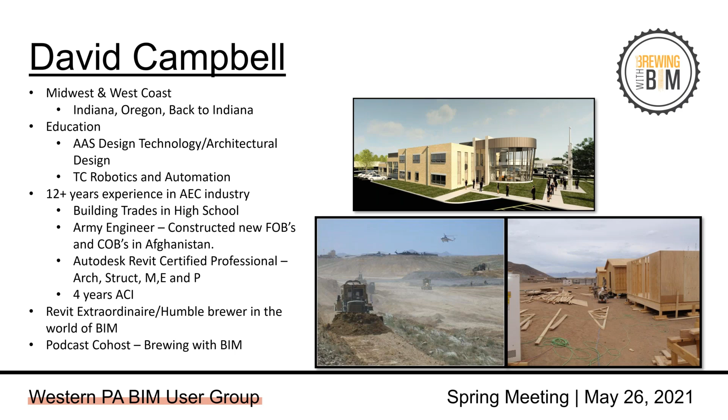I've been approached several times why a user group, and before I click through, let me explain something to you guys. In the Pacific Northwest, where Dave and I lived for a few years, you just moved back to the Midwest. I moved here about a year and a half ago.

Even when I lived in Texas, user groups were prevalent. They were a way for everybody to share information. If you were new to something, it was a great way to meet up with more experienced people, start a conversation, almost like an impromptu apprenticeship. And I love user groups for that. I love sharing information, just the environment of it, just the dynamic of interacting with people.

That said, in the Pacific Northwest, Dave, you and I hosted I don't know how many user groups, and then across the country we did this thing called tap tours, and we went to visit different cities and hosted in breweries all across the country. With that stuff though, we got a kind of microcosm of an environment, like we were creating a mini AU of sorts, where alcohol was free flowing, which is definitely key when we're talking about AU. But there was also great construction technology happening, conversations happening. So that was always great.

But the reason why we wanted to bring that here is because honestly, click the next one, my man, this is the best city, hands down. I've lived in like a dozen cities, and Pittsburgh, it's got its quirks, but I love it. It's pretty kick-ass, and I can say that this is a user group, right? It's great, so I love being here.

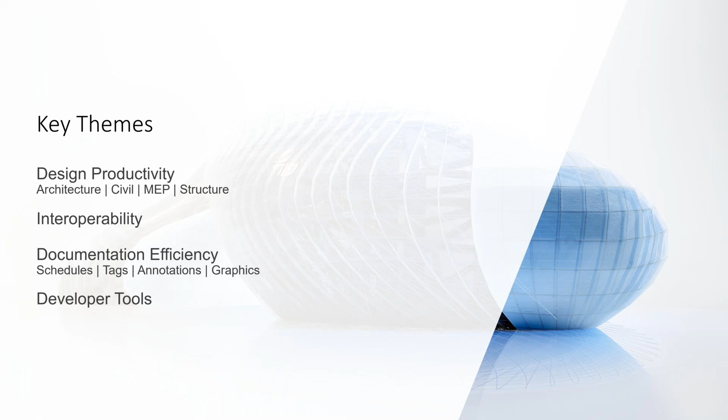Thank you, Joey. There were so many feature updates to Revit 2022, I had a hard time cutting them back without being discipline specific. I've included a lot of good features here. I'm going to demo quite a few of them, but I have a list of all the different features I'll show toward the end of my PowerPoint. If you have questions on any features we didn't cover, feel free to reach out. Starting with what's new in Revit 22, we have to talk about the key themes. Autodesk typically breaks down features into themes: improving design productivity, interoperability or collaboration, documentation efficiency—schedules, tags, annotations—and developer tools, so what's new with Dynamo. Some of these I won't go too deep into; I don't want to do death by PowerPoint, so I'll jump in and out of the PowerPoint into the program.

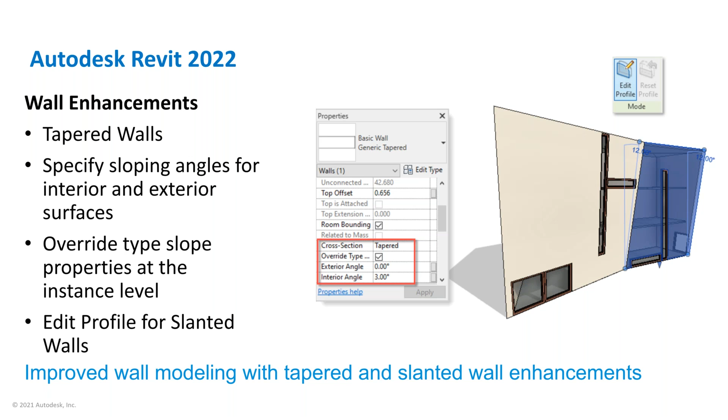Let's get started with design productivity. The first one I'm going to dive in and show you is the wall enhancements. One cool thing is that we've now got the ability to specify tapered walls. You can specify the sloping angle for your interior and exterior surfaces, override that type slope property at the instance level, and edit your profile for slanted walls if needed. If this wall is going to be tapered, we'll scroll down into Revit and see the cross section in properties, where we can select tapered, vertical, or slanted, and specify my angle. So if I wanted, say, a 6 degree exterior angle, I can hit apply.

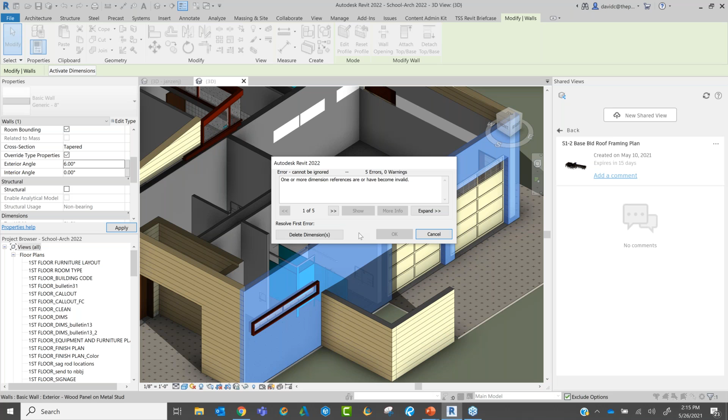And it's going to let me know that one of my dimensions has become moot, but there we go. So now we've extended out the bottom portion of our wall.

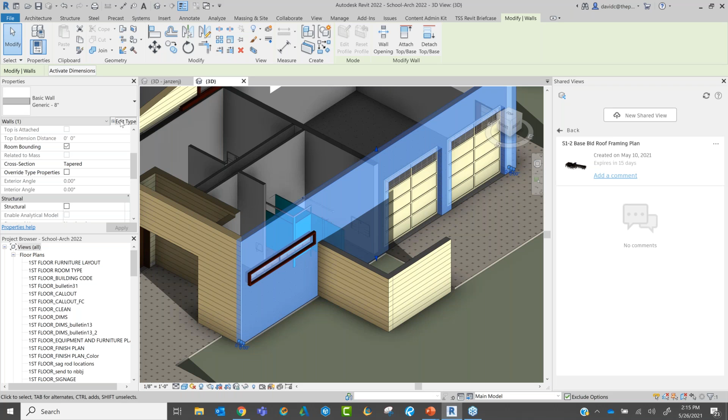If you want a slanted wall, you can adjust the angle from vertical, and for the vertical wall, we can select any one of these. One thing you need to think about if you're going to use a tapered wall is that one of your elements, at least the core or one of the parts of your assembly, needs to have a variable thickness. This is an important part when editing that profile for these different slanted walls. We need to make sure they are variable in order to adjust as needed.

Now we do have enhanced RPCs for realistic views, just another rendering improvement. Essentially, Revit is supporting the new RPC 2.0 file format, which helps display complex, high-resolution geometries, physical-based materials, and lighting, giving you more intelligent parameters. You have asset parameters that you can assign and utilize to improve the performance of your realistic views, with options to switch off different RPCs in the model or display the orientation in billboard mode towards the camera.

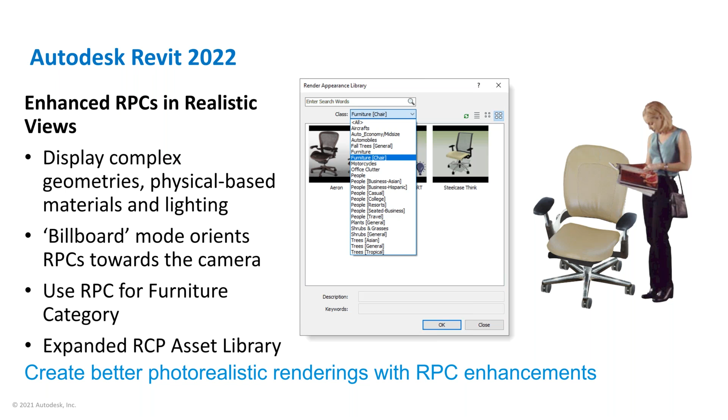Now, another one I'm going to jump in and show, because I thought this one was really neat, is a route analysis tool. This helps us visualize the multiple ways occupants can move in and out of a space. If you have a one-way situation, with COVID we've dealt with, at least at the beginning, a lot of grocery stores trying to control traffic through the building and specify that these are going to be one-way. So we needed to make some of those life safety travel maps, or even just maps for navigating the stores themselves.

This is also going to allow us to place elements with built-in clearances. So if we know that a person needs 5 or 6 feet of spacing, that social distancing, we can place a person with that built-in distancing space. Then we can overlay spatial grids into rooms to aid with element distribution, helping abide by those physical distance requirements.

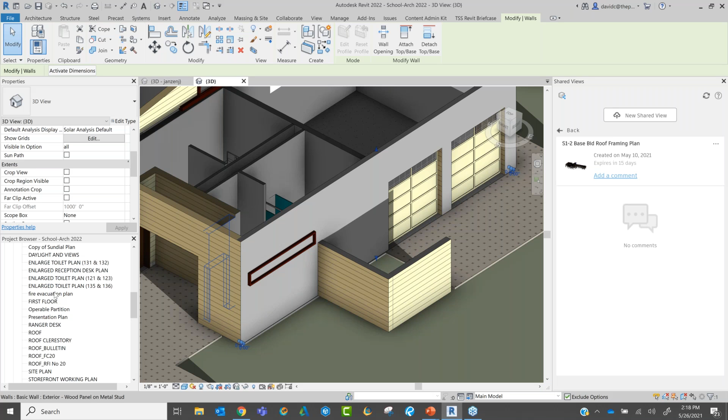And I'm going to jump into Revit for this one as well. I'm going to go ahead and get into, where's my life safety plan? Let me find this one. I should have opened this up already. Oh, there it is, fire evacuation plan, that's fine.

So you're going to see I've already drawn one up here, and this is kind of what I was talking about. Here's the one-way indicator. Here's one of those people we can put with, let's say, a 6 foot distance. Now, to draw these out, it's actually pretty awesome, they've made it quite easy to do this. We go to the Analyze tab, and here's where you can go with the path of travel. If you have multiple paths, you can select that as well. Here's your one-way indicator, the people content, and that spatial grid.

What's nice about this is if I know I'm going to go, let's say, from this room here, I want them to actually go out to this door. Typically I'd have to draw it up, draw it over, and then draw it back. This was 2 clicks, and it's going to essentially draw that path of travel for me. So to do that again, I'm going to draw this here and push it right along with this one.

You're going to see that it's going to join these two lines together and merge them here for that kind of one line of travel. Okay, and it's doing that automatically for us.

Now, if you notice, right here, I need to probably add a point to bring this thing back a little bit, so I'm going to add a waypoint. This really just means that you can customize where this line is going or where they need to go to. You'll see it grab that line here, so I could do the same thing here, or just update it. I need to pull it back here, I guess, so I'll add that waypoint, and then I can bring this back the same way that I did the other.

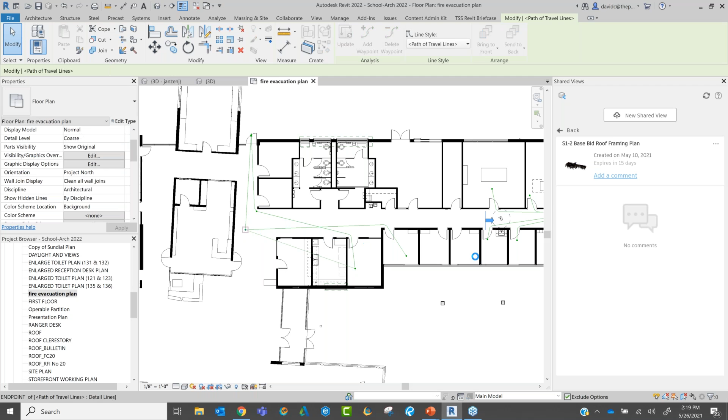And it automatically adjusts for me. So those are very nice features, especially for drawing out those quick plans.

Now you'll also notice that we have some infrastructure enhancements. They actually gave us a modeling capability for bridge and road categories. Essentially, you can utilize a generic model family, create a template, and it can be assigned to that bridge and road categories and your subcategories, your abutments, your piers, different things like that. Now these families can host rebar, they can be defined as cuttable in views, and now they can be scheduled and tagged.

Now you're also going to notice that they've provided some small enhancements to aligning and stationing these. You'll see that you have the flip controls to add to the alignment station label. The true start and end stations of your alignment are exposed, and in your Revit API, if you want to automate some of that bridge design, we can do that as well.

You're referring to Dynamo? Yes sir, I am referring to Dynamo. I apologize. No, man, just making it a conversation.

Yeah, it's kind of full circle here, because what they're doing is giving us that capability. They've added it into the developer tools, but the problem was we'd have an issue connecting to some of these different families, especially if we're wanting to break this down into, like it's showing here, piers under that infrastructure, or under that bridge family, or the template that you're using.

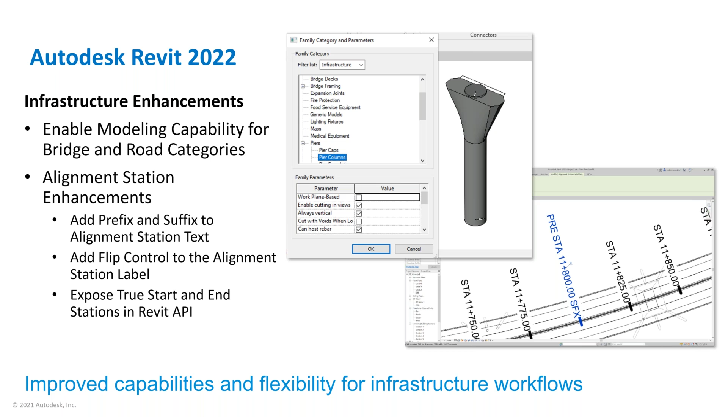Now you'll also notice they gave us the capability to rename the default shared site. I was wondering when this one was going to be there, to help with the confusion we've had for quite a while in terms of naming the survey point or the shared site point. Essentially, right now, we can go ahead and rename this default shared site location in any template.

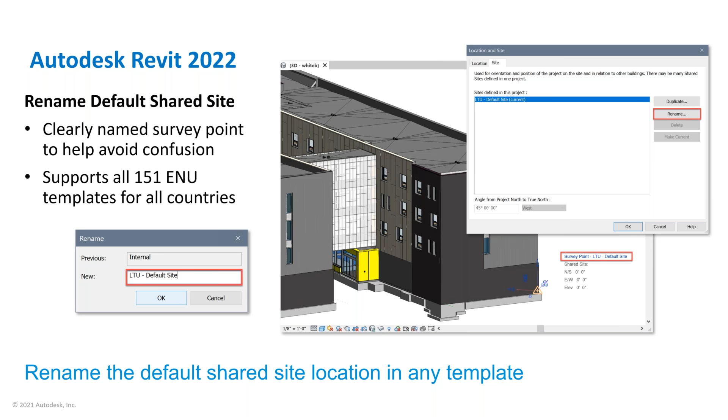Now another improvement for more of my MEP folks, they have made some improvements to design to fabrication. One big thing I really like is that the tool itself is a little bit more flexible, enabling the mapping conversion from your Revit families to fabrication parts. You'll notice that it's actually showing here in Revit 2021.

I was dealing with this earlier today, where I would convert my design parts to fabrication, and my connections just don't come over. Then all of a sudden it gives me this message where I have open connectors. Well, with Revit 22, they've given it the intelligence to notice, hey, we need an elbow here, we need a T, we need a Y, and it's giving us the capability to add in our tapered ends or what have you, and bring those elements in instead of just faulting out and telling us it's open, and then I have to figure out how many of these are open and where they are.

Now you'll also notice that you can connect your fabrication elements together in Canvas by dragging your connectors, as with your design parts, and your fittings can be placed. That's really going to give us more consistency with our different layout tools as we're actually drawing our pipe.

And we can use essentially these different design line logics and things like that to send out to the CAD MEP, EST MEP.

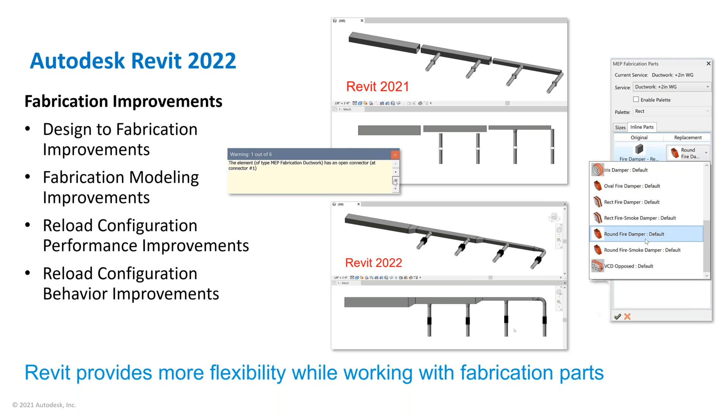Now, another tool we're going to see focusing towards the MEP or HVAC side, you're going to see that they've added some new functionality with systems analysis in terms of the load and psychrometric reports. You're going to get more detailed reports and outputs and be able to explore those different results in, I believe, an HTML web browser. Essentially, after running the simulation on your systems analysis model, you can view that summary for QA/QC checks. You can report and show a breakdown of your different load components, your totals for sizing of equipment, that psychrometric chart, and detailed psychrometric state point properties in printable formats.

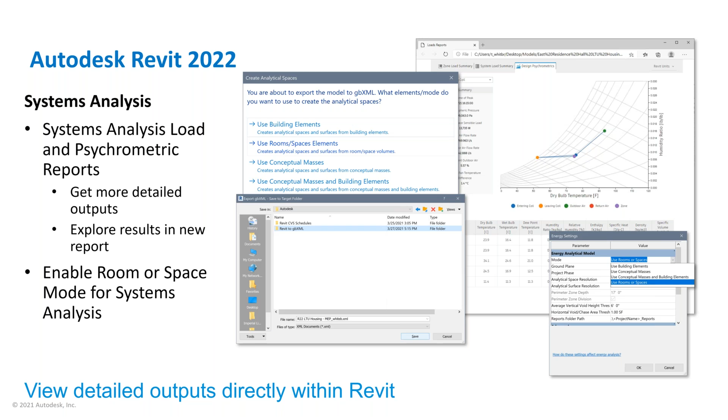So you can also export this to, if you need to consolidate it into that kind of Excel environment. I don't know why I said GBXML.

Another addition you'll notice is that they've actually tied back to the infrastructure, bridge, and road workflows. They're adding some more family categories for equipment and your different building elements. They've expanded these out to include audiovisual devices, fire protection, food service equipment, hardscape, vertical circulation, temporary structures, just different things like that.

And essentially, those families can be assigned to those categories, be defined as cuttable in different views. They can be scheduled, tagged. It's just helping to really start, I guess, get into more of the phasing and breaking down of the individual elements of these models and families, so we can schedule them out, or at least start phasing or planning a little bit better.

Now, you're also going to notice that they've expanded the category list for MCS, for your multi-category schedules and your material takeoffs. That just means when you're creating your multi-category schedule, you're going to find a few more categories and subcategories to choose from.

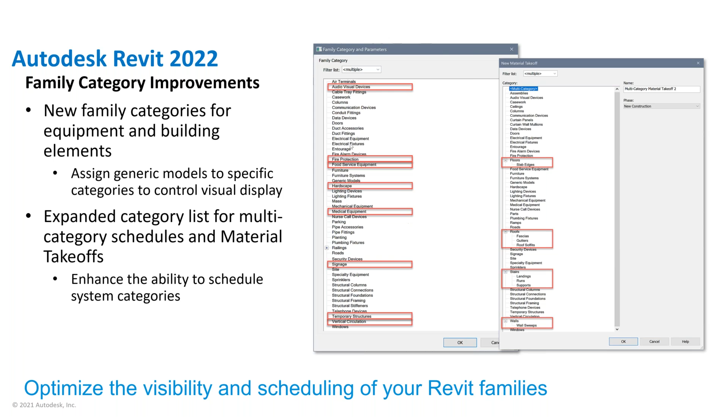Now, modeling rebar. This is an interesting one here, because I've actually had some good conversations with Joey about this, because we talk about Revit families that are created. This is where they had most of the enhancements - there were like 30 slides just on rebar. Oh yeah, there were so many enhancements for structural, which I'm feeling pretty happy about, because I started out kind of structural within Revit, and I'm seeing all of this functionality coming over from, let's say, Advance Steel, but also the rebar portion of it.

In this instance, Joe, we were talking about families, and a lot of times it would be great to be able to model in like an offset or a clearance spacing. In this case, that's what they're kind of giving us here, in the sense that anytime you're detailing your rebar, you can go ahead and, if you know your rebar is going to have ribs or something like that, and the real diameter of that bar, you can specify that model bar diameter. Now, of course, the rebar constraints, your distances to the concrete cover, your bar geometry, the segment lengths.

They're going to be computed using that model bar diameter parameter. So in that sense, it's just saying, if you want your cover spacing to be 2 inches and you adjust the size of that model bar to thicken it out, it's going to go ahead and drop that bar down to automatically place it where it needs to be. It just has that intelligence to be able to recognize that.

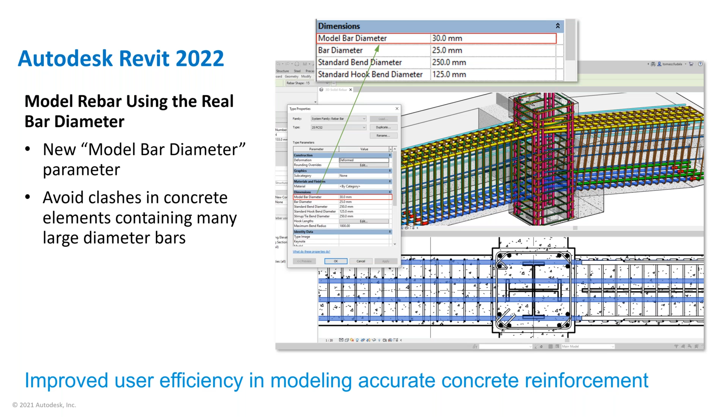Another cool feature is that we can move rebar within a set. Typically, we'd tab through to select different rebar paths or sets, but now you can grab the entire set without tabbing through, or move and remove individual bars within that set to avoid clashes with other rebar, openings, or penetrations, while maintaining the logic of the overall rebar set.

Another interesting thing is that you can edit multiple sets or systems at the same time. If you're looking at a repeat detail inside a footing or column, like common penetration holes throughout the first through third floor, you can grab those multiple sets and make changes all at once.

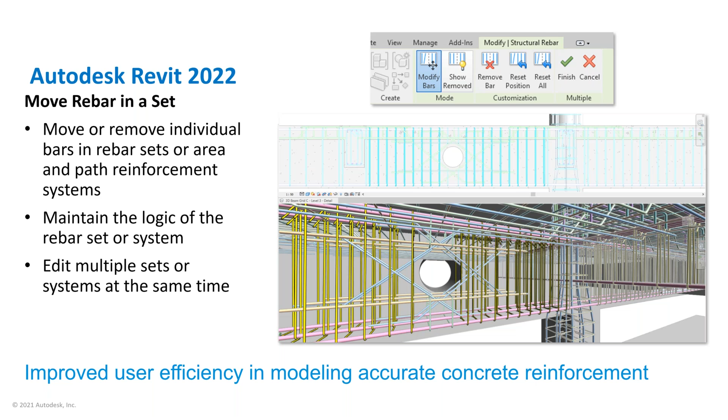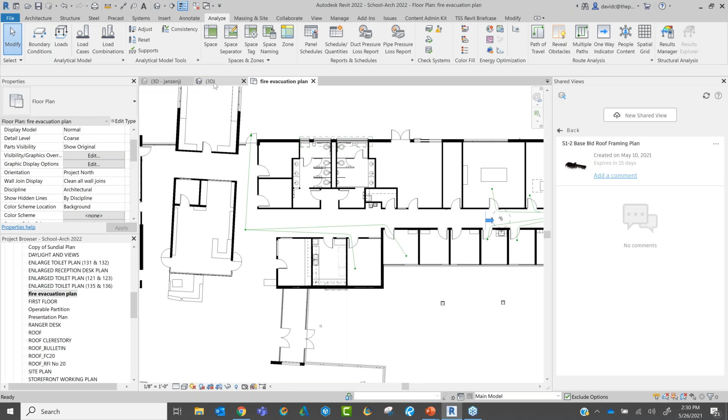This next one I wanted to show because I thought it was really neat. We can utilize this new tool to place rebar by just clicking 2 points. For those who've modeled rebar in the past, we had a tool where you'd select your host surface, then your start surface, then your end surface, giving you the capability to model rebar traveling through there.

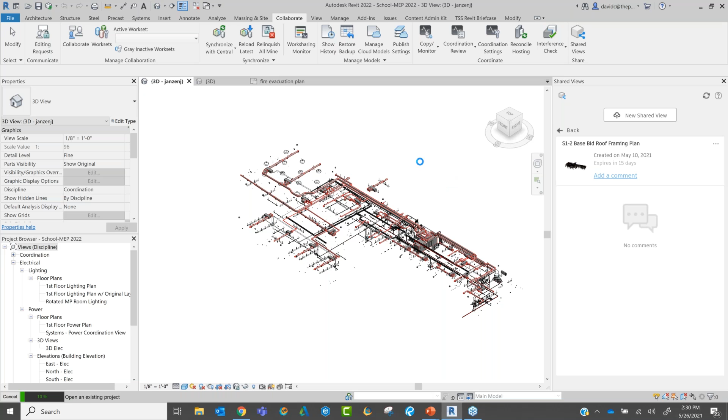I realized I did not open my model, so I apologize. Let me grab this one up here real quick. Okay, I'm going to overwrite, and that's good. This one's kind of giving it away. I am going to talk about those shared views here in a little bit as well, so we'll dive into that, don't worry.

What I wanted to talk about within this structural model, if I get under either structure or under steel, I'll typically see those rebar options.

Now I can also, I think I might have froze up Revit here. I might have just opened up the wrong model. This thing might be having issues for me. I apologize, guys. It wouldn't be a webinar if we didn't have technology freeze up on you. I feel like that's par for the course, man. Yeah, I don't know what it's not liking me very much, but it's always the live demos, of course.

Essentially, when you click on that slab, we can click on the rebar tab that'll populate there. It's nice because if I wanted to take rebar throughout this entire slab, I'd click on the corner here and maybe a corner over there, and it would fill up the entire slab with rebar based on those 2 points. I could also specify the number of bars, the layout type, maximum spacing, maximum number, or minimum spacing. So creating your basic rebar sets, but with less picks and clicks to populate the rebar throughout your element or concrete.

Since I can't check if this one's come up yet... no. Okay, so I'm going to jump back in here then, and we'll keep going until the next one I wanted to demo.

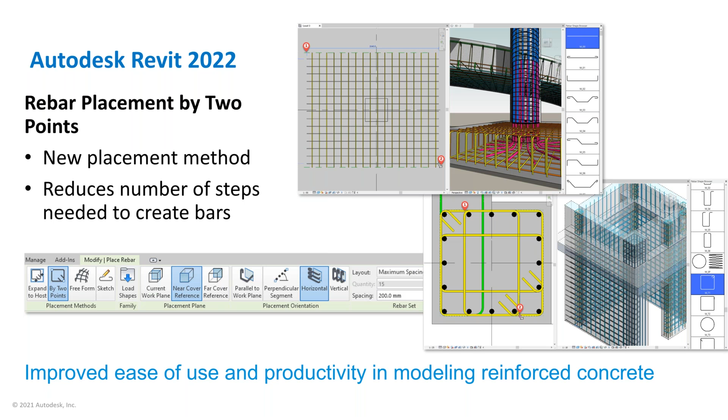Another mention here, back to Dynamo: you'll notice we can associate our steel connections with different profile sizes, multiple profile sizes. So if you create a library of steel connections, you have predefined ranges of applicability you can specify. For example, if I have a base plate I want to apply to any of the 14 by 43 columns, but also to any W16 by 26s, I can specify that range of applicability, and when I run my Dynamo script—base plate by ranges, in this case—it'll run through, notice that entire range of columns, and apply those base plates for me.

It's really nice in that case where if you're using different types, whether it's concrete or steel, or different family types or instances within the project. Most of the time you got to click on it, grab all those instances, run it, then go back again and grab the other ones. At this point, we could just include them all in one.

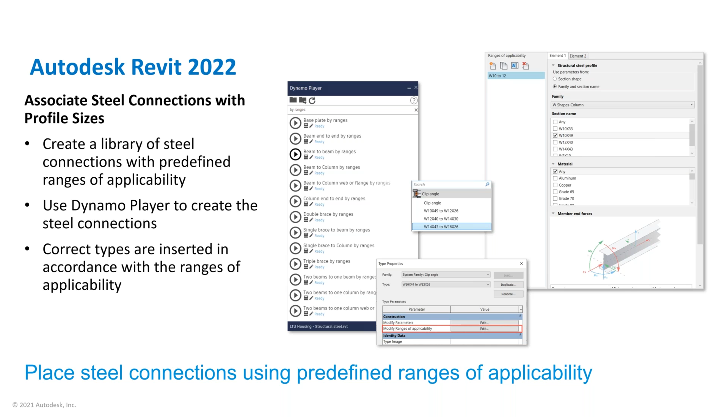Now back to that categories. They've made some category lists in terms of sorting within your schedules, so we can actually break it down and filter by our category. You're going to see that essentially we can just start the filter itself by the category and then break it down as we need to from there.

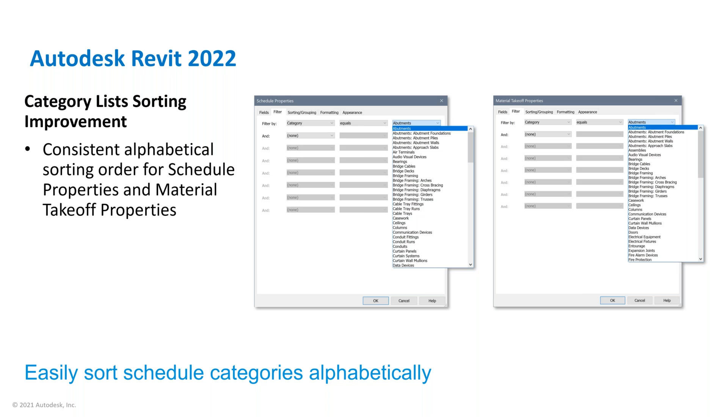They've also given us improved parameter identification UI, adding some parameters for the user interface. What we're going to see is that you can literally search the parameters by name, and filter them by their properties. So if you're looking for what parameter might be involved with something like total length or system name, we can go ahead and start searching what parameters are involved with that. We can also use information in those tooltips - as you highlight or hover over something, that tooltip will pop up to help you identify the correct parameter to work with.

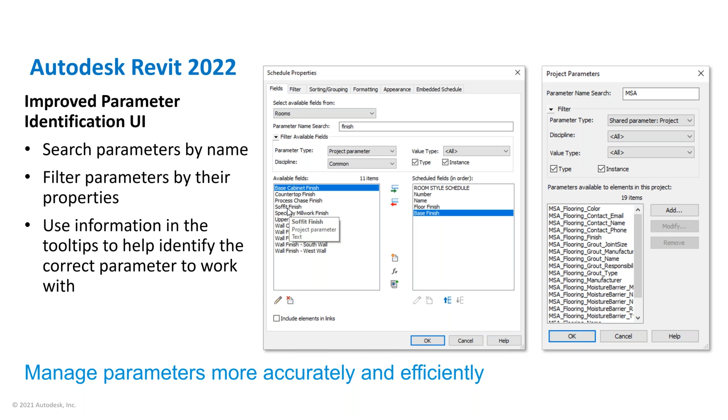This one, for any of our older Revit users, is going to be pretty familiar. I don't know if anybody remembers - back in the day we had Autodesk Seek, and it kind of went away for a while, became BIM Object, and we used Revit City and all these other sites to bring in content. But essentially Autodesk has brought it back as Load Autodesk Family.

What that means is that it's just going to open that default content provided by Autodesk, accessed from a cloud-based repository. In the past few releases of Revit, they haven't been releasing the content as you install Revit. You typically have to go to another website, find that content pack you want, download it, and move forward, unless you're going from a completely custom library. In this case, they've thrown it up on the cloud, giving you the capability to tie into that family data hosted on the cloud.

Now you're going to see that there are sequential search facets that you can essentially add or display the criteria for each of these families. So as you start building your different categories or filters, you're going to see that you can just kind of break it down based off of the type, the category, or what have you.

Another one I was confused as to why it took so long - I don't know if anybody remembers back when you could not detach a tab for your Revit models. If you wanted to work in one floor plan and switched to another, it just overlapped it. You had to try to tile or cascade your windows to see all the different things you had going on, or if you had multiple monitors, stretch it over. This is one of those things that took a while, but I'm glad it's here - they give us the capability to resize our dialogues now. Some of those, like visibility graphics, purge unused, edit text, things like that - before they didn't really let you move or resize them much. Now you can reposition that as you need to.

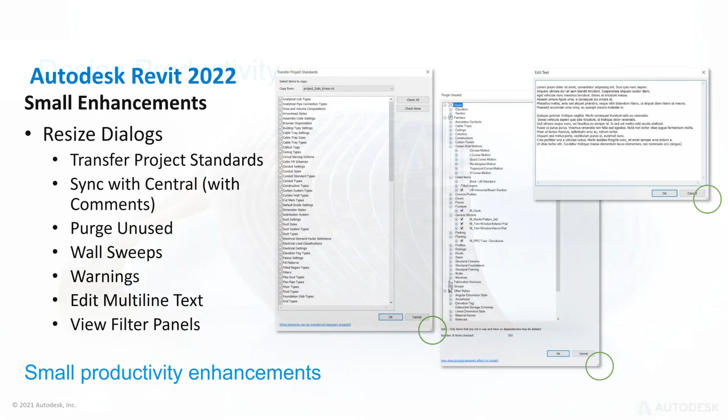All right, now on to the next portion of this: design productivity. With design productivity, Autodesk has given us a native 2D PDF export tool. Just like printing out to all of your other mainstream PDF programs, the PDF export dialog offers similar options to the print dialog - your ability to export the visible portion of the view or a user-defined selection of views and sheets. Your naming rules can be set up within the setup section of the dialog box, and you can use this to generate those PDF file names automatically based on your project or sheet name parameters. You can also choose to have the exporter detect output size and orientation automatically from the selected views and sheets.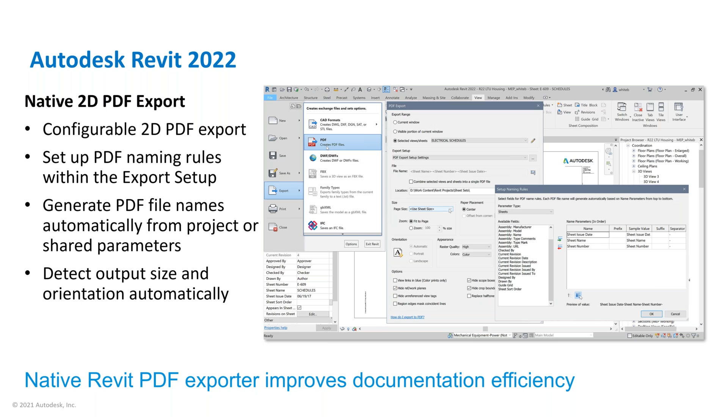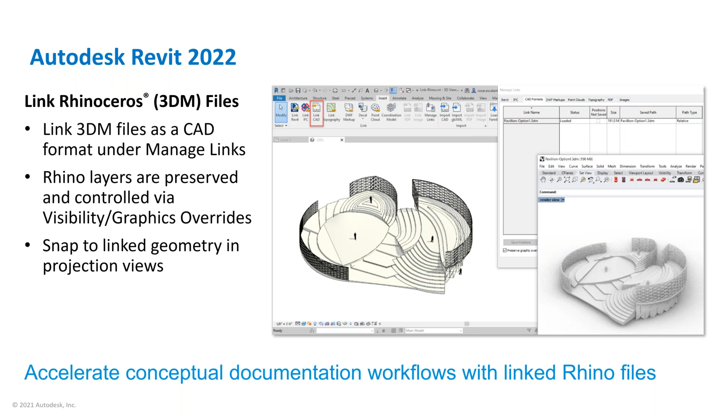Another one I'm excited about, because I've personally worked in this, is the improvements they've made with FormIt Pro - 3D sketch and send to Revit. That's been something we could do for a while, exporting from FormIt and bringing it into Revit as a mass, translating the masses or geometry to walls, floors, roofs, things like that. But with Revit 22, they've expanded those functionalities to better integrate Revit with FormIt Pro. Now you can translate Revit elements back into a FormIt Pro session using the new 3D sketch functionality, so we can continue exploring and tweaking the design using those intuitive modeling tools in FormIt, then send that geometry right back into Revit.

I feel like FormIt is the most unutilized tool in the AEC collection. I agree, I can't agree with you more.

For me, this functionality it has within FormIt to be able to just push and pull - I've actually got my 9-year-old son and my 11-year-old daughter just working on FormIt, playing on FormIt. They build their robots, they build buildings, they build their little houses, kind of like on Minecraft. It's a very intuitive program.

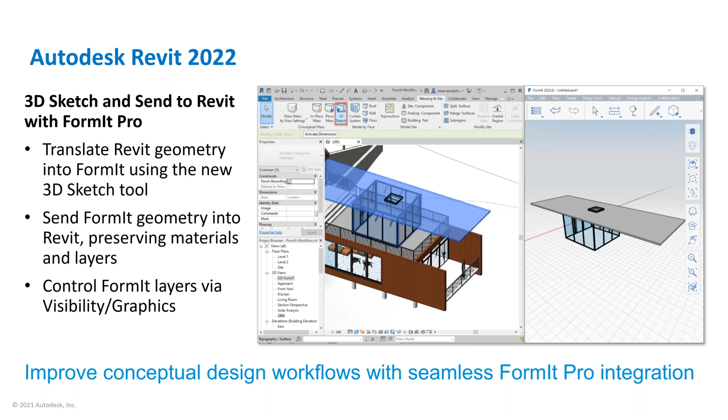As we knew before, one of the problems of trying to bring a family from FormIt into Revit is that it loses the intelligence. But if we can send something from Revit to FormIt and bring it back and have it keep its intelligence, I think that's very, very important. Speaking of intelligence, the next portion of this actually goes into that as well with the IFC4 export certifications for architecture and your structural reference views.

So what they did is they went in and got that certification for the IFC4 reference views, but it just sets the definitions and the associated Revit shared parameter definitions. They've been updated with the latest IFC4 PSDs, and it's really supposed to significantly improve the performance of linking in some of these IFC files containing elements with a lot of different parameters.

And they've added the ability for your IFC exporter to pick up information from your site location regarding the geocoordinate reference in EPSG code format as required by IFC.

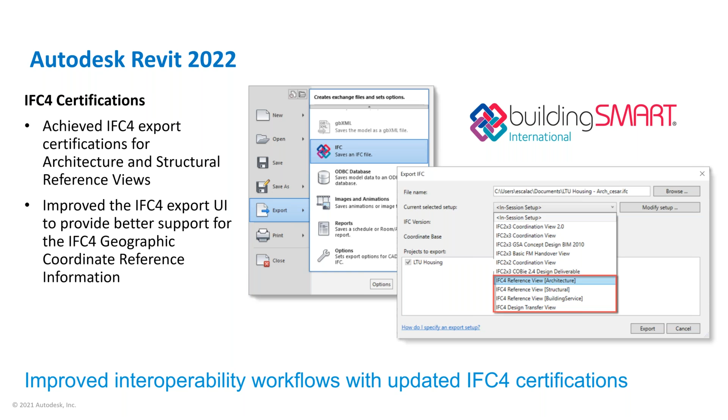Another cool feature, I know we're on it, right? I mean, right in between the different kind of workflows—I want to say supplemental or symbiotic workflows. There we go, symbiotic. That's what I was looking for.

We can actually send Inventor models or assemblies and essentially turn them right into Revit models. You can link these Inventor assemblies in, and they come over as RVTs. They have nameable reference geometry, and you have persistent tags for your direct shapes. It's pretty awesome because when you're linking these Revit models exported from Inventor, it incorporates the new simplify command to produce your RVT model containing only the components and features needed for your Revit design. This command has been combined in Inventor and added to the property panel, so it's easy to use—a one-click button—to link that resulting RVT file into your Revit project.

Now, when you're linking Revit into Inventor, the Inventor user references the Revit project in order to keep the building design intent model synchronized with the manufacturing data. That allows the mechanical engineering task to be performed in the context of the building model. Then when your manufacturing models are positioned and sized correctly, exporting the design as native Revit data strengthens project coordination and review.

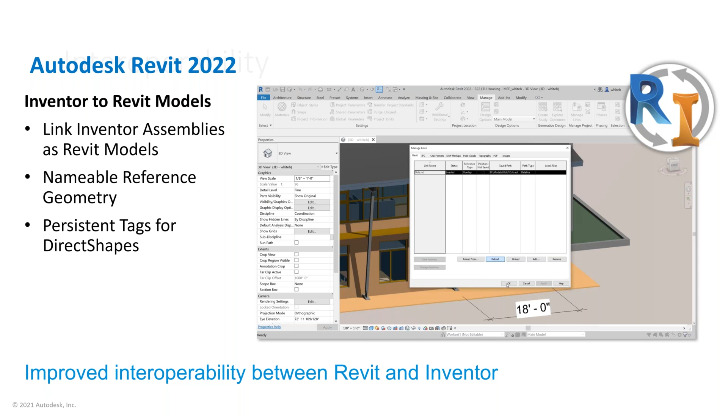Now, I know I kind of tied off to this one earlier, but new shared views, right? We have our 2D views as well—let me get into Revit here. So if I get into my S1-2 base bid roof framing plan, when I click on this...

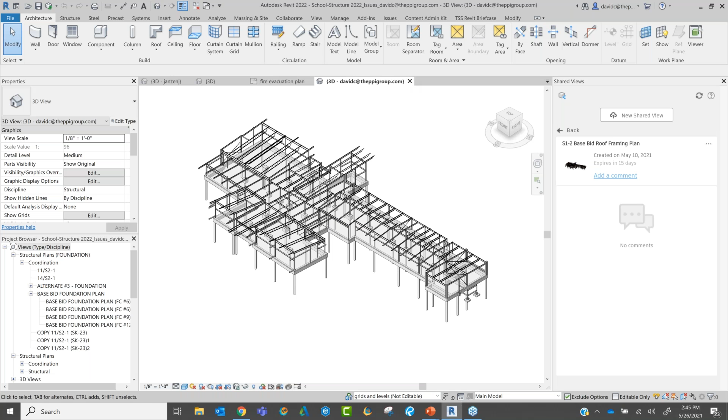Oh, that's right, I froze it up. Dang, do I have one? All right, well, you know what, let me try the dreaded close it, reopen it. That's what I'm thinking, man. I was hoping it would catch up, but I'm not thinking it's going to. It's that Indiana internet you're on, man. Yeah, right. Oh boy. All right, I'm going to end this one real quick, and then I'll jump back in and get it going here.

But essentially, we can create these shared views to share with any of our different project partners. And really, what this means is it's not even just a project partner with somebody in Revit—that's where I really wanted to go.

I'm opening up 2020. I don't know why I'm opening up 2020. Sorry, guys. All right, there it is. That's the one I wanted. Yeah, I'm going to upgrade it. That's fine. But basically, when we create these shared views, it gives us the capability—did I just open that up twice? Interesting, okay.

So it gives you the capability to share these views through, I don't know if anybody has used it before, the Autodesk Viewer. And the Autodesk Viewer is HTML web browser based. Really what it does is it allows you to go ahead and not only view those models, but comment and mark up on those results in that web browser.

Now, the cool thing about this too is that it actually connects back to Revit. And I kind of showed that in the shared views I had before the crash there, but you can click on these shared views and it'll open up in the Autodesk Viewer. You can place these markups and then they can see it right within Revit. You can actually reply back and respond to these comments without placing more comments on the actual document itself, just by typing out different messages, and then resolve different elements.

So this is actually under the Collaborate tab within Revit. And let me see if mine's opened up yet at all. Nope, okay.

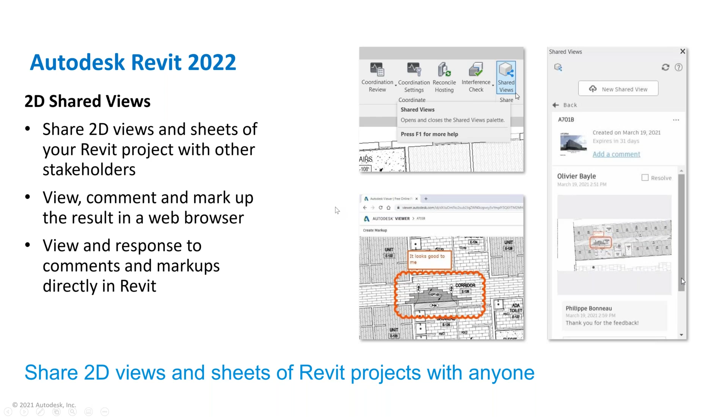I'll go ahead and push through this one since we have limited time. This goes back to connecting people involved in this process, the stakeholders who may not have Revit or a license needed to mark up these documents. It gives everybody an easy way to create shared views, share them to anyone, and give those people the capability to find that and mark it up right through an HTML web browser. Now, another thing you'll notice is that they've made cloud model improvements.

You'll notice that opening a cloud model from the file menu, this was back from Revit 2021, we can open that right from the file menu. The unified cloud model initiates under the user interface now, so you're going to see that Docs essentially will pull up under our home screen in Revit. We'll be able to see that Autodesk Docs and then navigate to that.

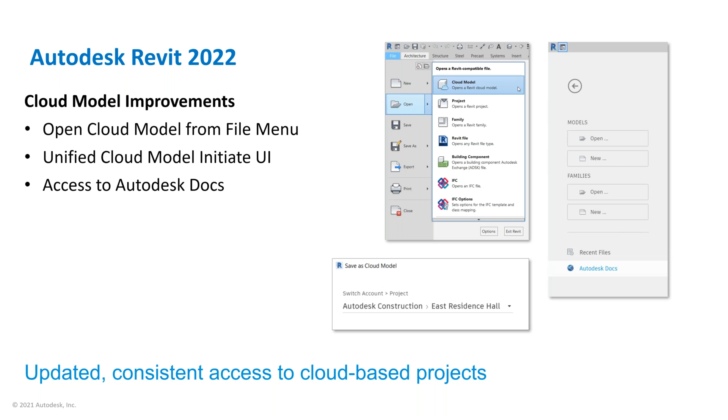The other thing I wanted to talk about with cloud model improvements is that they've integrated the connection between BIM 360 and design applications such as Revit, AutoCAD, Plant 3D, and Civil 3D with the issues capability. So if you've played with issues inside of BIM 360, or you notice clash or coordination issues that you want to mark, you can create it not as a markup, but as an actual issue, like a blip that lives inside the model and connects into that Revit model to show everyone. I'd say it's still only BIM 360 at this time, but it's coming to ACC soon.

Now into design productivity, you'll see an added work set parameter for scheduling of work sets. So we can go through, filter, and schedule by our work sets, and then utilize the work set parameter in our material takeoffs, view lists, sheet lists, and title blocks.

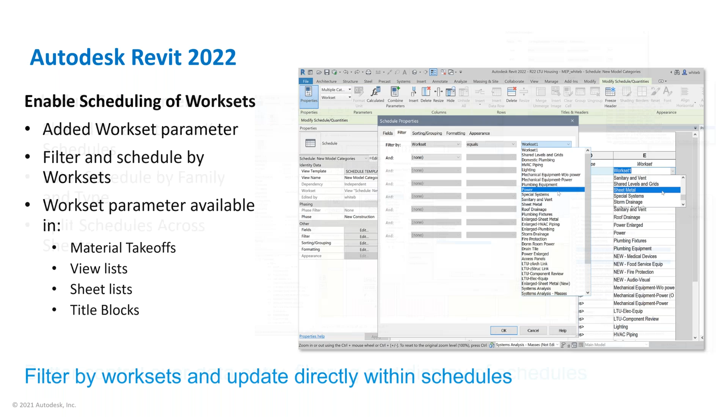You'll also notice that shared instance parameters associated with categories now appear as available fields when you're creating a key schedule for that category. The key schedule filters compatible parameters that may be included as well. You can also add shared parameters to the category when you create the key schedule, but using shared parameters in your key schedules essentially makes it possible for your key schedules to drive your geometry or control your visibility in your families.

When a key is applied to an element, properties assigned by that key become read-only in the properties palette, so essentially like establishing a template. Revit will indicate the status along with a tooltip for each parameter in that key schedule, so those parameter values are derived from the key value and will display to the right of that value. You can use these shared parameters in families and then include the shared parameter in a key schedule to control that family's geometry using that key schedule.

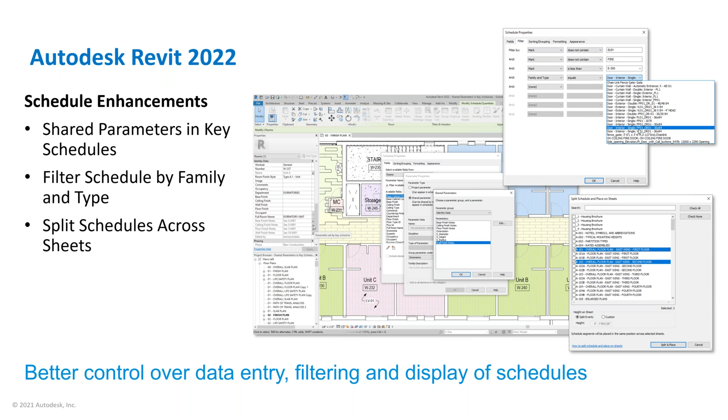They've also made several tag improvements. When you rotate a tag in Revit, you might like to control the angle value precisely. The new angle parameter for tags found in your properties palette makes it easier to control the display angle of that rotated tag. If you rotate the tag with the rotate command, the angle value is automatically calculated, but you can enter a specific value afterwards if you like.

You'll also notice multi-leader tags. If a view in your project contains similar elements that you'd prefer share a tag, you can now apply a single tag to multiple elements and even indicate the total quantity if desired. Once a tag has been placed in the model, you can add or remove those leaders to similar host elements at any time by selecting that tag and using the add or remove host option in the contextual tab of your ribbon in Revit. The quantity of those host elements is automatically tracked and displayed both in the tag itself and in your properties palette. You also have access to snap to specific points to modify where those leader lines are going.

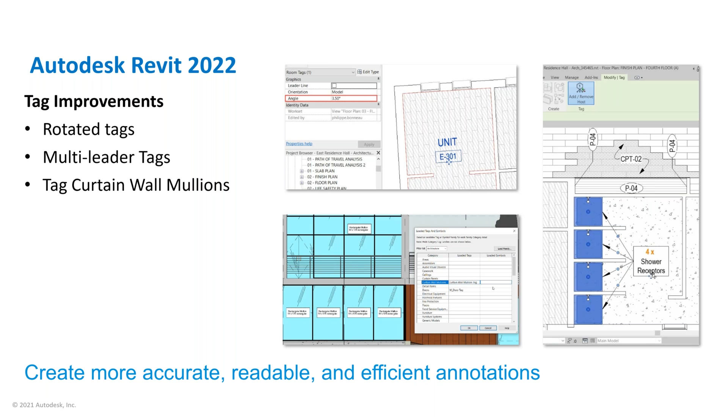This is a nice one too. If you have elements that are tagged from your link models, they've made improvements to the behavior of those tags in hosted models. You'll notice that they'll now remember the linked element ID. So if a linked file is unloaded or out of date, the tag may be orphaned. However, when you bring a new file in, when you reload that linked file, the tag will attach to that linked element automatically because it remembers that ID.

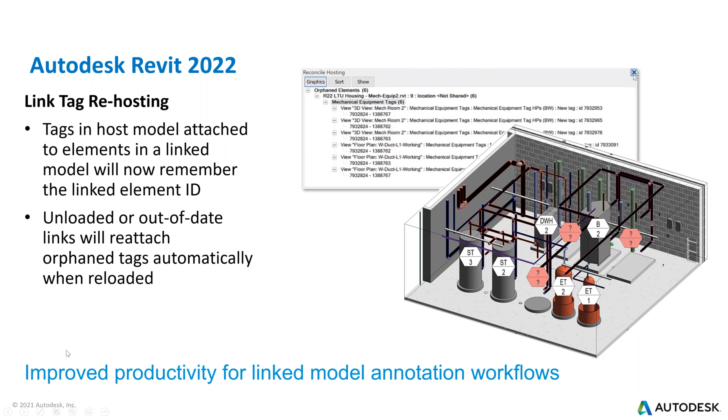You'll also notice that we can add custom dimensions containing prefixes or suffixes. The nice thing is they've brought it out into the type properties. Previously, you could only add prefix and suffix values to individual instances of a dimension. Doing it in type properties saves us time, and we can associate that throughout a whole line of dimensions if needed.

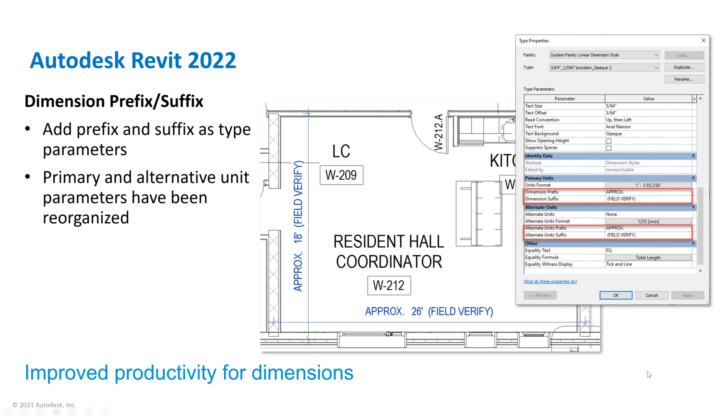You'll also notice that we can add spot slope labels and elevation markers on your ramps or ramp runs in plan, elevation, section, and 3D views.

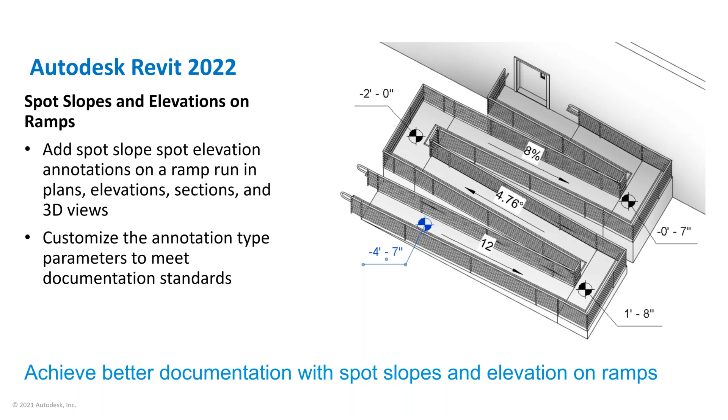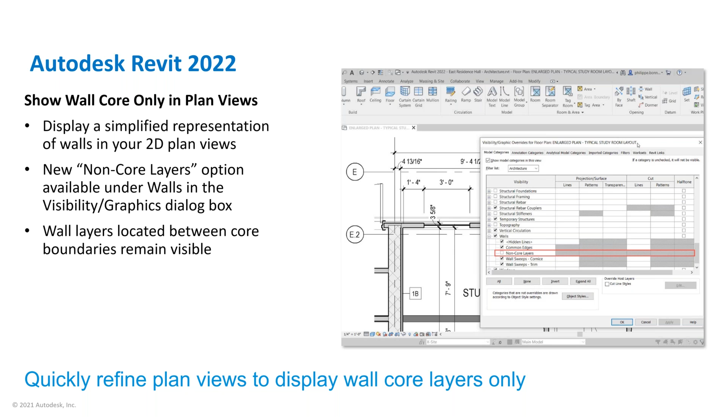Hey, Dave. Yes, sir. You've got so many slides here. Sorry guys, there's a lot of different things here. We still had too many, I apologize, and we cut this in half too, man.

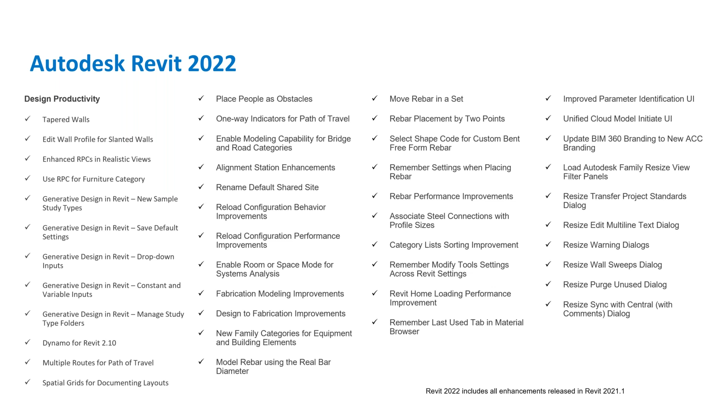I've been doing my best to field these questions. Jordan asked: is this different than the BIM 360 issue markups, and does the person making the markup need to have Revit to access the HTML link, or can they mark it up?

No, it's not like BIM 360 in that sense. For markups with shared views, it's literally placing them in the Autodesk viewer, somewhat like the BIM 360 workflow. Actually, they can mark it up with the link - the Autodesk viewer gives them the capability to place a markup in it. So they can place markups in the viewer and then push it back. It's not an issue, it's just markups.

I'm not sure because I feel like there's two names here, or maybe it's one really long name. I apologize, but I'm going to call you Joe because my name is Joe and I like it.

You're a landscape architect looking at plugins to create freeform terrain. Are you aware of any workflow to get this, or is this a conversation for us to have later on? This is definitely a conversation we can jump into in depth later - feel free to reach out. The initial answer is there are several add-ins out there to help with freeform terrain creation. But if you're looking to stay within Revit, I'd look at whether this information can start within Civil 3D.

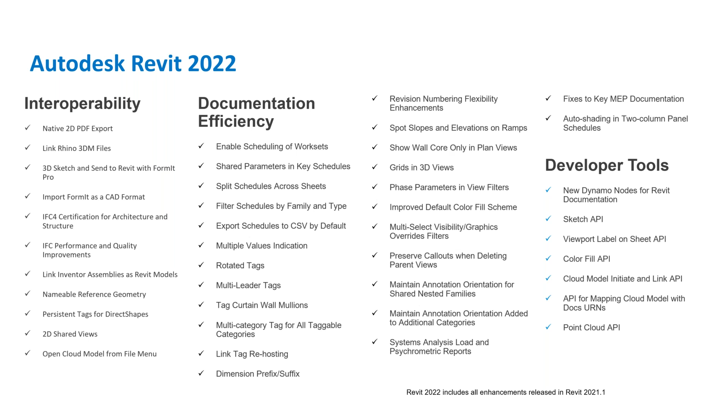Somebody mentioned a tool, and I want to look it up real quick before I reference it. Something about parallax team, let's see... Environment for Revit, somebody mentioned. Oh yeah, create modified topography. I can't even say that word, and I have a geography degree, so I apologize. It looks like it might help out on that front as well, as far as creating the terrain.

Any other questions? Anybody have anything else? I see no hands raised.